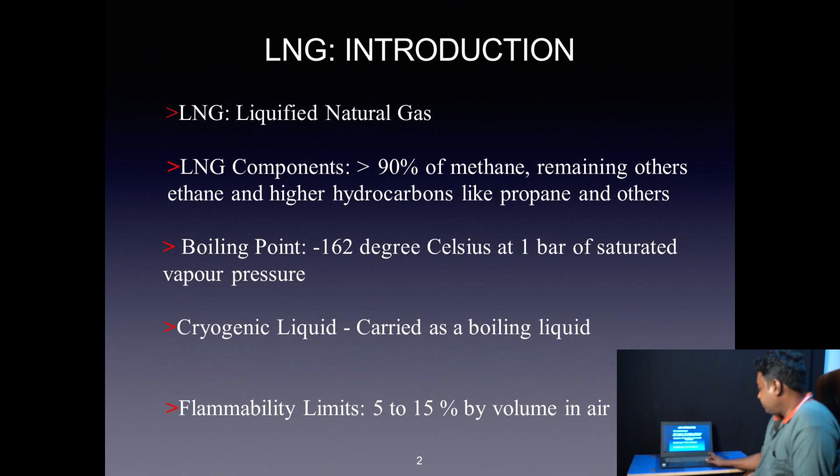Then what is LNG bunkering? Bunkering means the process of transferring fuel to ship for its own consumption, and LNG bunkering means transferring LNG as a fuel to ship for its own consumption.

Why is LNG bunkering needed? Because currently heavy fuel oil is the main marine transportation fuel, but it contains a huge amount of sulfur, that is 5000 ppm, meaning 5000 mg per liter of HFO, heavy fuel oil, meaning 5 gram per liter of heavy fuel oil, and it is too much.

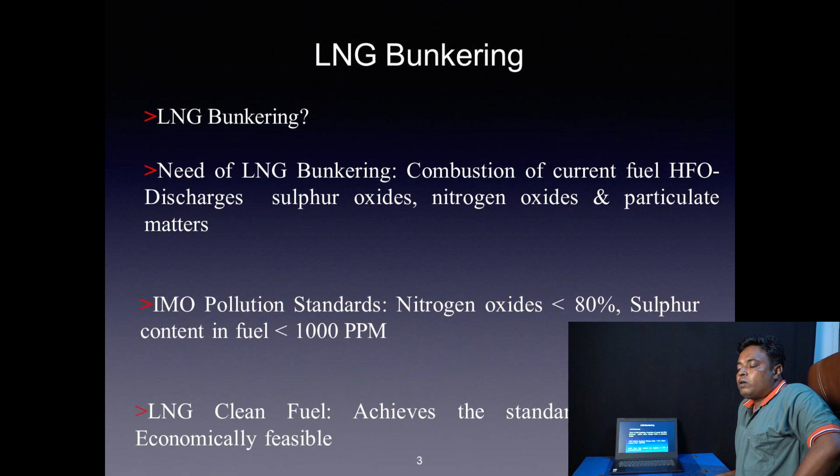And the other thing is, once sulfur oxide is released from the combustion of the ship engine, it is almost 2700 times higher than from road vehicles. Therefore, International Maritime Organization set the pollution standard according to which nitrogen oxide has to reduce by 80%, and the sulfur content in the fuel has to reduce below 1000 ppm, which is currently in the range of 5000 ppm, and therefore there is need to reduce it from 5000 ppm to 1000 ppm.

And the alternate fuel, clean fuel, is LNG, which is cheap and which achieves the pollution standards decided by the International Maritime Organization.

Then what is the existing LNG bunkering protocol? As per the existing protocol, pre-inerting is necessary to carry out, to displace oxygen by inert gas nitrogen, and pre-inerting is carried out till the composition of oxygen in the exit stream reaches equal to or less than 1%, and pre-inerting is followed by purging.

Purging is carried out to displace nitrogen by LNG vapors, and it is carried out till the LNG vapors get detected inside the exit stream. Then purging is followed by cooling.

Cooling of bunker lines has to be carried out to the temperature of the LNG to be bunkered, and once the cooling operation gets over, the actual transfer operation can be initiated. During the transfer operation, LNG fuel can be transferred from a storage tank to the ship's fuel tank.

Once the transfer operation gets over, it is necessary to drain out the LNG from the bunker lines. Otherwise, it gets warm, vaporizes, and pressurizes the steel structured pipelines and flexible hoses, and finally bursts out these pipelines and hoses. Therefore, it is necessary to carry out the draining operation.

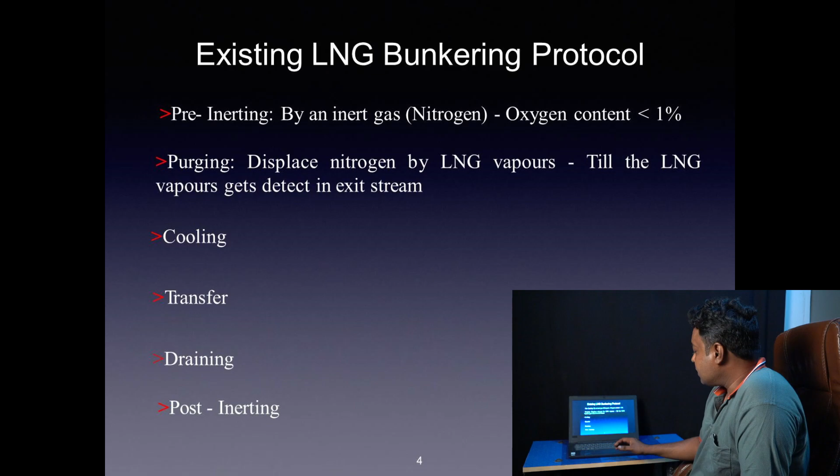This is the brief graphical presentation of the existing LNG bunkering protocol. First of all, connect the hoses and pass nitrogen through the bunker line for carrying out pre-inerting. Pre-inerting is followed by purging, which is carried out by displacing nitrogen with LNG vapors.

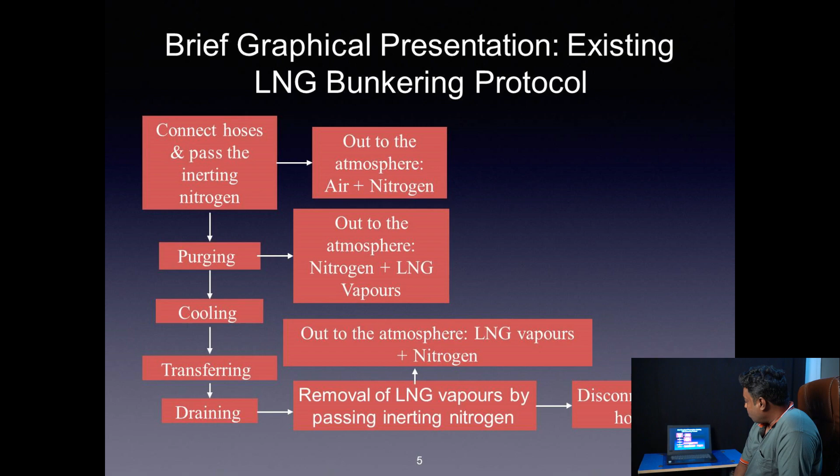Purging is followed by cooling. Cooling of the bunker line is carried out to cool the bunker lines to the temperature of the LNG to be bunkered, and once the cooling operation gets over, actual transferring can be initiated. Once the transfer operation gets over, it is necessary to drain out the LNG from the bunker line, and after draining there is need to remove the LNG vapors from the bunker line by passing nitrogen, which is called post-inerting. Once the post-inerting operation gets over, then we can disconnect the hoses.

This is a possible LNG bunkering system designed on the basis of the existing LNG bunkering protocol, but there are some limitations associated with it. Pre and post inerting operations are time consuming, and nitrogen is needed to carry out these operations. Therefore, a nitrogen generation system should be available there, which makes it economically not feasible or beneficial.

Then during purging, there is exit of LNG vapors from the bunker pipelines, which forms a flammability zone in the vicinity of the bunkering system. Then cooling is also time consuming.

Draining: during draining there is a possibility of LNG getting trapped inside the sealed structure, which will get warm, vaporize, and pressurize the hoses and steel structured pipelines. Therefore, finally these pipelines and hoses get burst out.

Then during post-inerting there is the exit of LNG vapors, and these LNG vapors form the flammability zone in the vicinity of the bunkering system. Therefore, it is necessary to burn these LNG vapors before allowing them to pass to the open environment.

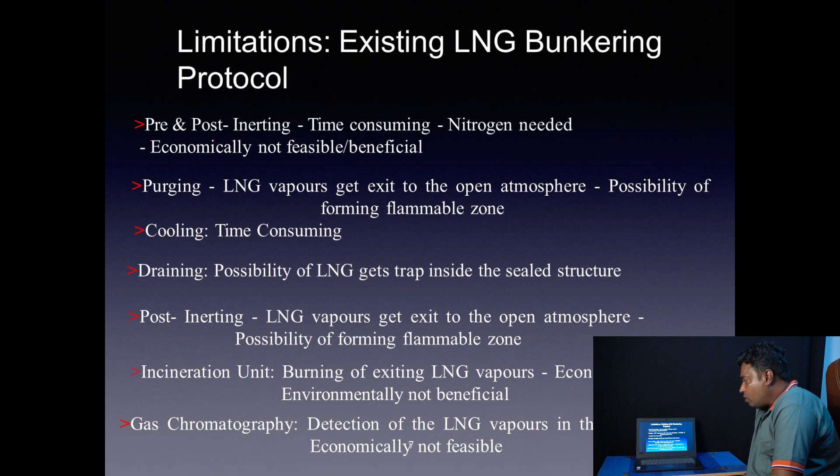Then gas chromatography is needed to detect the composition of oxygen in the exit stream while the pre-inerting operation is in progress, and to detect LNG vapors while purging and post-inerting operations are in progress. Implementation of gas chromatography is economically not feasible.

It is necessary to predict the time layout of the existing LNG bunkering protocol. This is the pilot plant in which LNG can be bunkered from the storage tank to the ship's fuel tank.

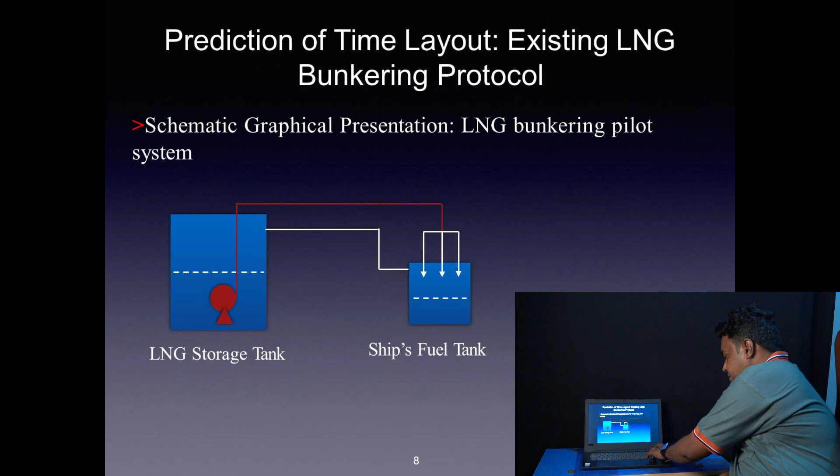Time required for pre-inerting and post-inerting has been estimated on the basis of exit age distribution, meaning RTD study.

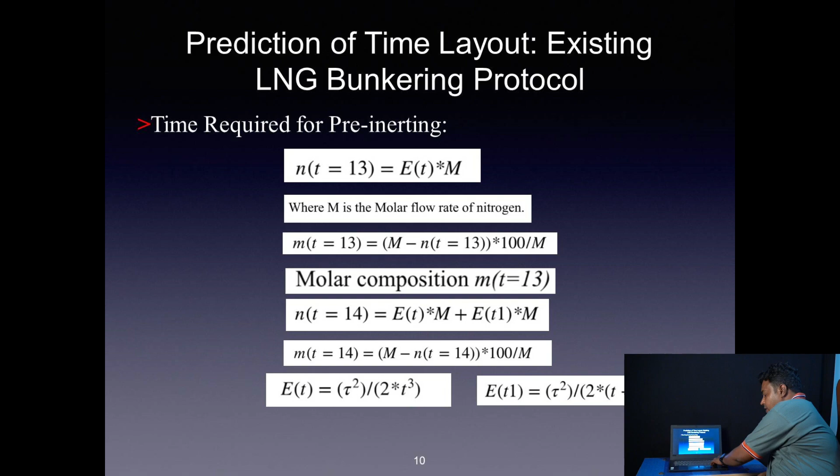The time required for purging is nothing but the time equal to half of the residence time, and the cooling time has been estimated by doing the heat balance across the bunker pipeline.

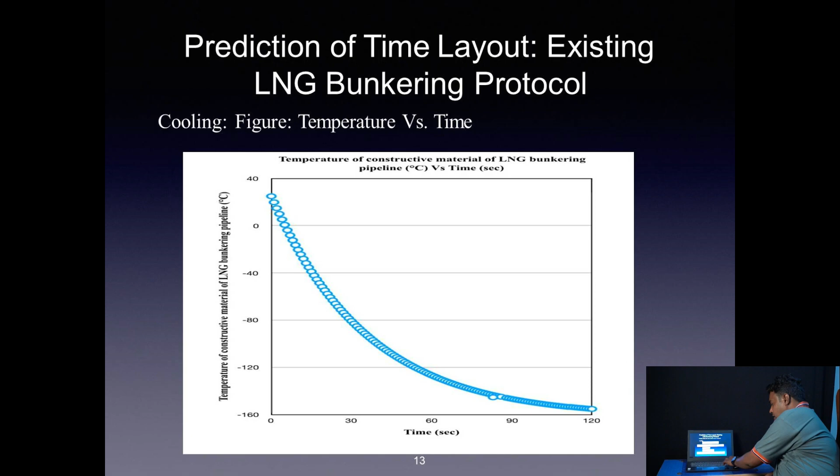The time of transferring has been estimated on the basis of the total volume that needs to be transferred and the transferring flow rate of LNG.

The time required for drainage has been estimated on the basis of the volume of the bunker pipeline and the draining flow rate of the LNG.

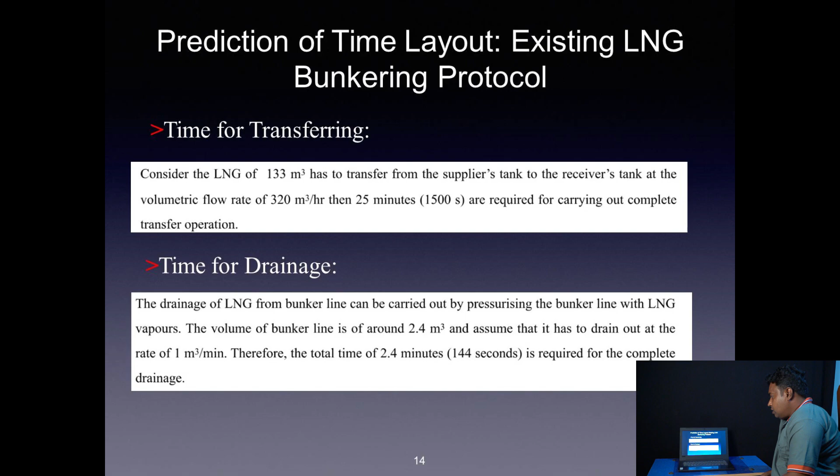But this is too much time consuming. It is not easy to operate. The existing LNG bunkering protocol is not easy to operate.

It is time consuming, and nitrogen is needed for carrying out pre-inerting and post-inerting. Therefore, it is not economically feasible.

There is a need to burn out the LNG vapors which exit from the purging and post-inerting operations, and this is not environmentally beneficial or environment friendly. By considering all these technical limitations, we have invented a new protocol, which is called the novel LNG bunkering protocol.

As per the novel LNG bunkering protocol, we have to apply vacuum and suck the air content from the bunker lines, and once the air gets removed from the bunker line by applying vacuum, then cooling of bunker lines can be initiated by passing LNG vapors through the bunker line.

And once the cooling of the bunker line occurs to the temperature of LNG to be bunkered, then actual transferring of LNG can be initiated.

And once the transfer operation gets over, then there is a need to drain out the LNG from the bunker line. Once the draining operation gets over, the bunker line contains only LNG vapors.

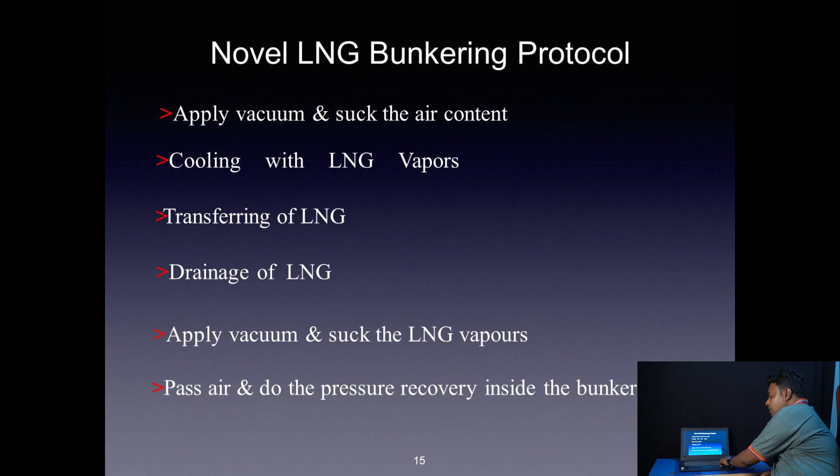Therefore we can pass air inside the bunker line for pressure recovery. And once the pressure recovery is done, then we can disconnect the hoses.

This is the brief graphical representation of the novel LNG bunkering protocol. First of all, connect the hoses and apply vacuum to suck the air content.

Once the vacuum gets developed inside the bunker line, we can pass the LNG vapors and circulate these vapors through the bunker line to cool down the bunker lines to the temperature of the LNG to be bunkered.

The cooling operation is followed by transferring. Once the transferring gets over, then we have to carry out the draining of LNG from the bunker lines to the storage tank.

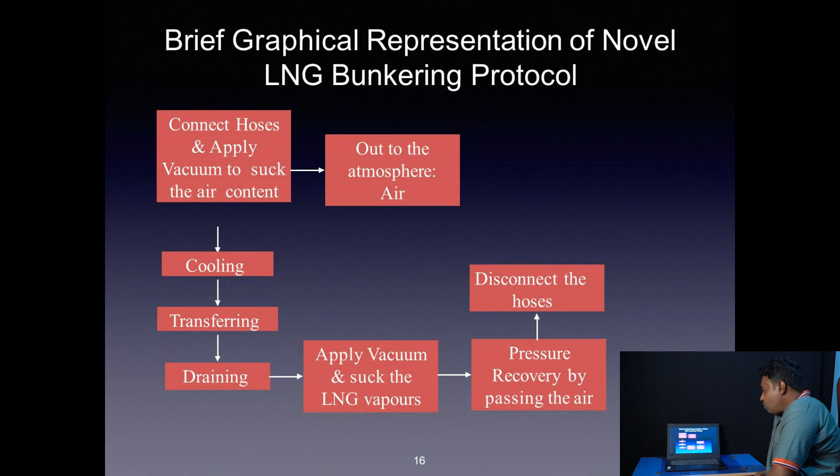And once the draining gets over, then we have to apply vacuum and suck the LNG vapors. Once the LNG vapors get removed from the bunker lines completely, then we can pass air inside the bunker lines for pressure recovery, and once the pressure recovery is done, then we can disconnect the hoses.

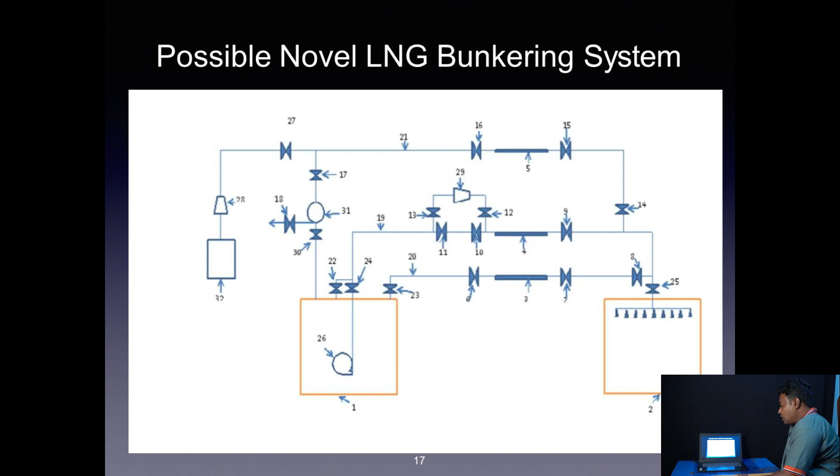This is the possible LNG bunkering system designed on the suggested or invented novel bunkering protocol.

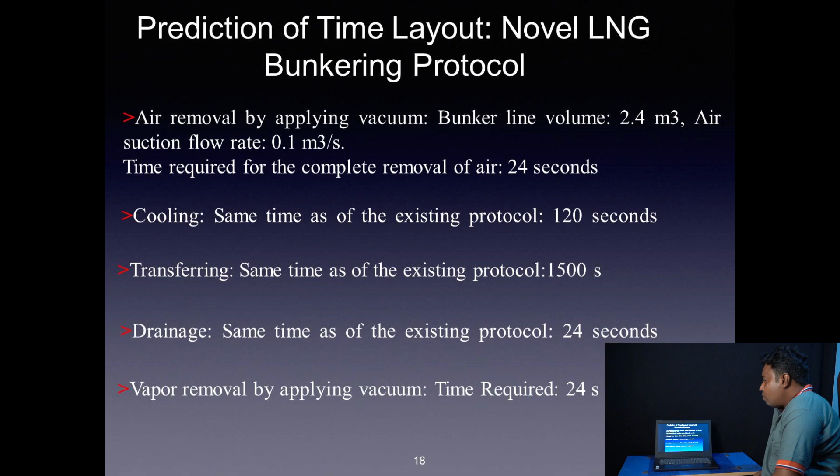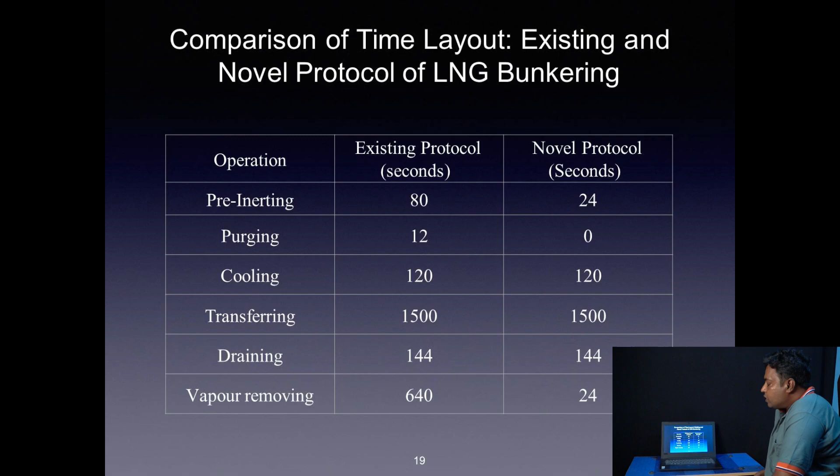The prediction of time layout for the novel LNG bunkering protocol has been estimated and compared with the existing LNG bunkering protocol. From this study, it is observed that the novel LNG bunkering protocol is time efficient as compared to the existing LNG bunkering protocol.

These two protocols have been compared on other aspects also. The first aspect is the need of nitrogen.

As per the existing protocol, pre and post inerting operations have to be carried out, and therefore nitrogen is needed for that, which increases the capital as well as operating cost.

But as far as the novel protocol is considered, there are no pre or post inerting operations to carry out, and therefore there is no need of nitrogen.

Therefore, operating cost and capital cost can be reduced. The implementation of gas chromatography is the second aspect.

As far as the existing protocol is considered, there is a need to detect the composition of oxygen while the pre-inerting operation is in progress, and also to detect the composition of LNG vapors while the purging and post-inerting operations are in progress. Therefore, gas chromatography is needed in the existing protocol. But as far as the novel protocol is considered, purging operations, pre-inerting and post-inerting operations are completely avoided. Therefore, there is no need for implementation of gas chromatography.

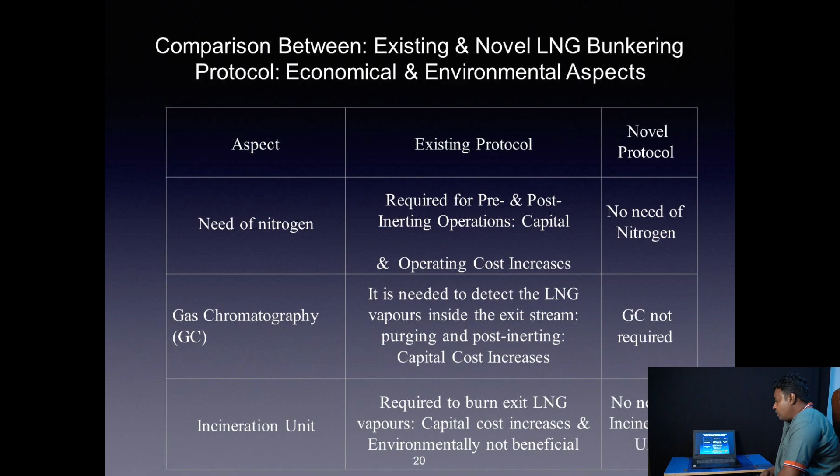The capital cost of the project increases, and if we are burning the LNG vapors, it is not environmentally beneficial either. But as far as the novel protocol is considered, we are avoiding the purging and post-inerting operations. Therefore, there is no need to install the incineration unit. Therefore, it is economically feasible and environmentally beneficial also.

Then we have developed one more protocol, called the accelerated novel LNG bunkering protocol. In this protocol, we use vacuum to suck the air from the bunker lines, and once the bunker lines are evacuated completely, we initiate the transferring operations.

We are not doing the cooling operations—why, we will explain later on. Then, once the transferring operation gets over, we carry out the draining of the bunker line, draining the LNG from the bunker lines to the storage tank.

Once the draining operation gets over, LNG vapors might be present inside the bunker lines, and these have to be removed. Therefore, we are applying vacuum once again to suck these LNG vapors and pass them to the storage tank.

The applied vacuum not only sucks the LNG vapors but also vaporizes the LNG trapped in the seal structure. Therefore, the possibility of the seal structured pipelines or hoses bursting over time is completely avoided. Once the LNG vapors are removed completely from the bunker line, pressure recovery has to be done.

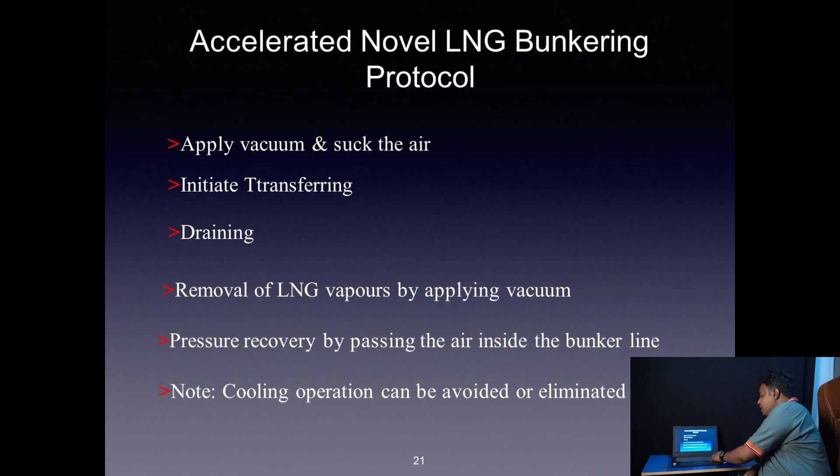Pressure recovery is done by passing air inside the bunker line, and once the pressure recovery is done, we have to disconnect the hoses. We avoided the cooling operation, which is too time consuming.

The graphical presentation of the accelerated LNG bunkering protocol is as follows. First, connect the hoses and apply vacuum to suck out the air content. Once the air gets removed from the bunker line, the transferring operation can be initiated, and once the transfer operation gets over, the draining operation can be initiated.

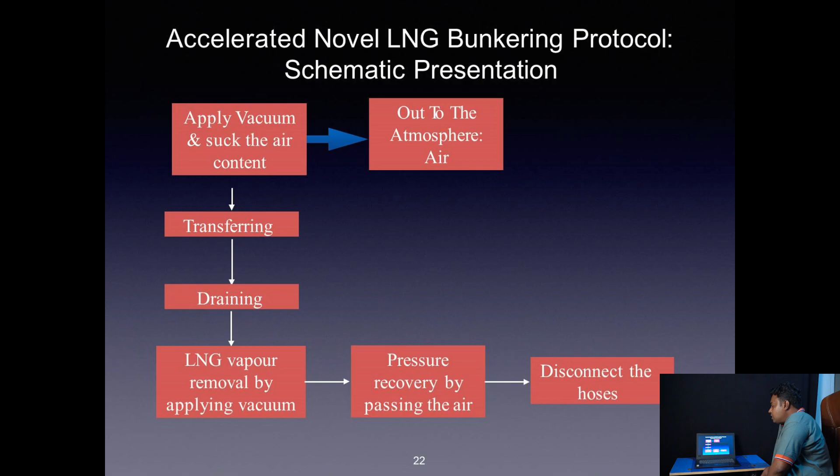Once the draining operation gets over, the LNG vapors from the bunker line can be removed by applying vacuum, and once the complete LNG vapors are removed from the bunker lines, pressure recovery can be done by passing air. Once the pressure is recovered, we can disconnect the hoses.

The confidential part is how to avoid the cooling operation. This has been avoided by designing the seal structured pipelines and hoses in such a way that there is no need of carrying out cooling for every cycle, and the designed hoses and seal pipelines should be capable of sustaining the negative pressure when we are applying vacuum inside the bunker lines.

This is the novel part on which we have filed the patent. There are so many people in the world doing research on this topic for almost the last 25 years, but they are not coming across the exact path of how to carry out LNG bunkering, and they developed the existing LNG bunkering protocol which we have discussed already.

This protocol is approved by the American Bureau of Shipping, and it has so many limitations as we already discussed. Therefore, we developed another protocol—the novel protocol—which is easy to operate, time efficient, economically feasible, and environmentally beneficial also.

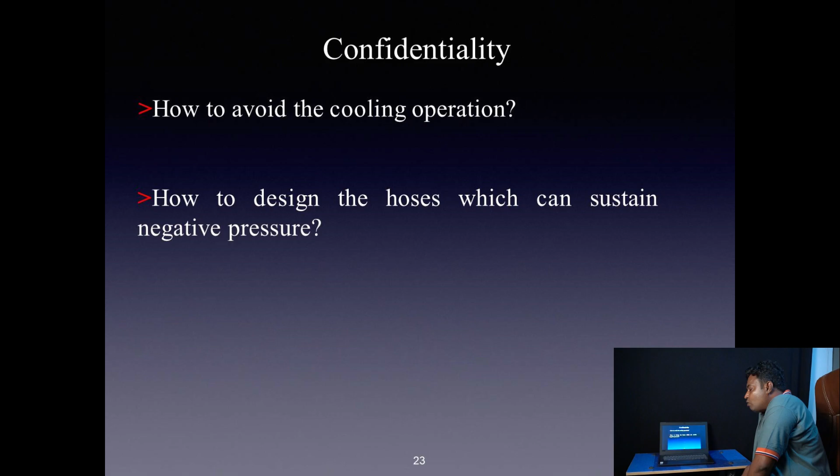Then we are coming across the second problem of LNG bunkering, because the rollover phenomena of the LNG storage tank is the major problem.

What is rollover? Rollover means inside the storage tank the rate of generation of boil off gas increases 10 to 100 times more than the normal value, and therefore pressure inside the tank increases and the pressure relief valve gets open, and huge amount of LNG vapors get escaped to the open surrounding. Sometimes it causes damage to the LNG storage tank.

The basic reason behind this is as follows: because of the density difference between the parent LNG and the filling LNG. That difference comes in density due to difference in temperature, difference in composition, or both. And if the parent LNG and the filling LNG are not mixed properly, then two layers get formed.

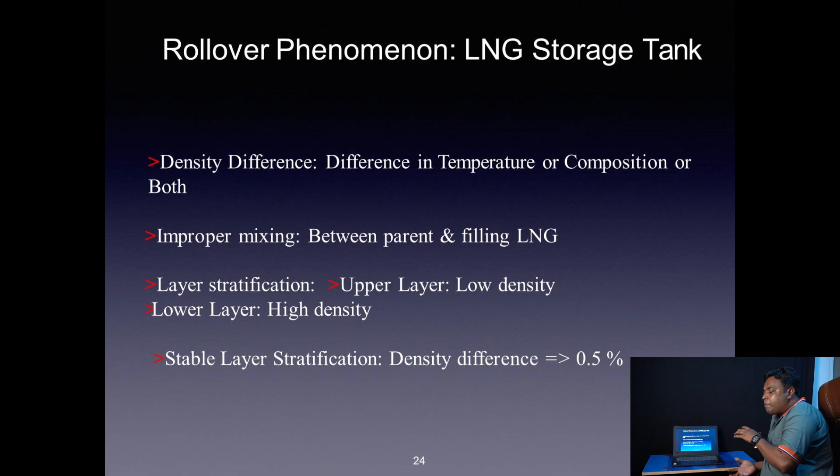And the time comes when the density of these two layers becomes equal. At that time instant mixing takes place, and therefore the thermal overfill of the lower layer gets released in the form of latent heat of evaporation, and a huge amount of boil off gas generates - 10 to 100 times more than the normal boil off rate - which increases the pressure inside the tank. This can damage the tank, or open the pressure relief valve and get released to the open surrounding.

And the other thing is, when the two layers mix vigorously, the heat of mixing is also responsible for increasing the rate of generation of boil off gas.

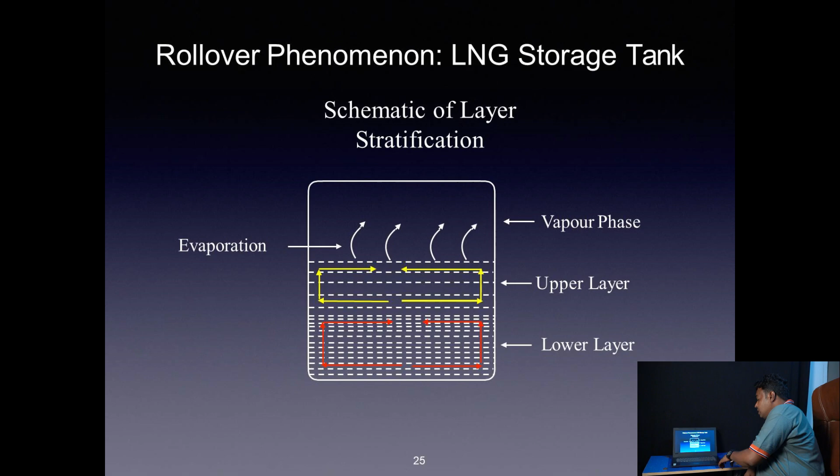This rollover phenomenon was first observed in 1972, and after that there were 40 events of rollover phenomena occurring in the world with cryogenic liquids. But scientists still haven't reached an ideal solution for how to prevent LNG bunkering, or how to prevent LNG or any cryogenic liquid rollover phenomenon occurring inside the storage tank. Therefore we came up with the ideal solution about how to solve this problem and how to control it if accidentally LNG rollover phenomenon occurs with cryogenic liquids.

These are the features, these are the factors we have to consider during the rollover phenomenon. During rollover phenomenon, as we discussed earlier, instant mixing between two stratified layers occurs.

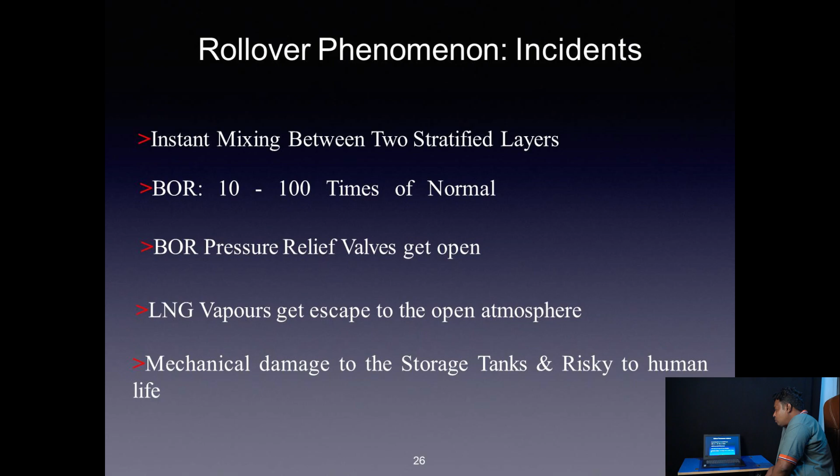Therefore the boil off rate increases 10 to 100 times as compared to the normal rate, and therefore that increased boil off gas generation rate increases the pressure, and the pressure relief valve gets open, and these vapors escape to the open atmosphere. Otherwise it can also cause damage to the storage tanks, and it is very risky to the surrounding human beings.

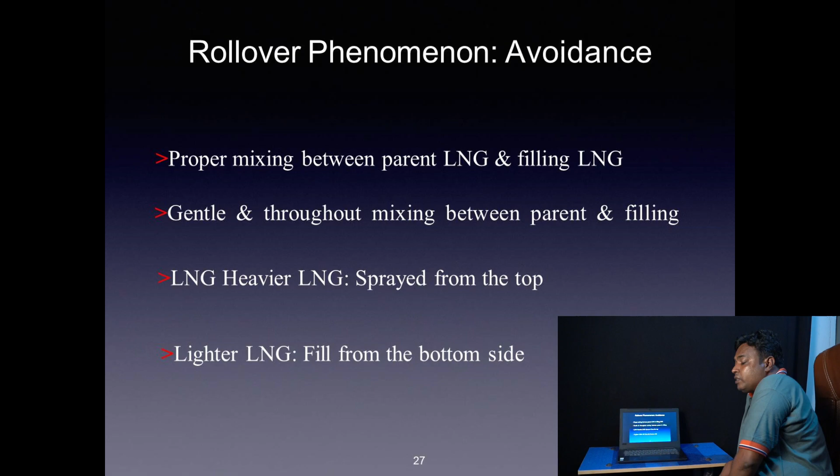And how to avoid the rollover phenomenon - because world scientists haven't reached a proper solution till today's date - we have given the proper and novel solution to this rollover phenomenon.

To avoid the rollover phenomenon, it is necessary to carry out proper mixing between the parent LNG and the filling LNG. The mixing should be gentle, and it should occur throughout the entire liquid holdup of the storage tank.

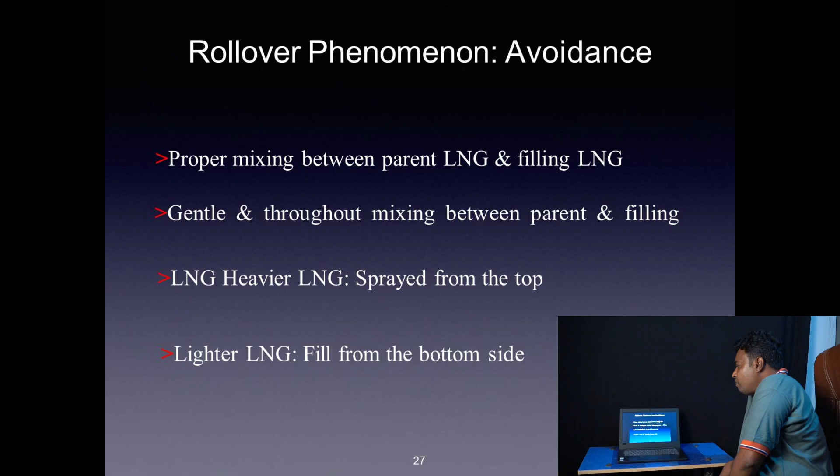If the filling LNG is heavier, then it has to be sprayed from the top side. If the filling LNG is lighter as compared to the parent LNG, then it has to be filled from the bottom side. And what will be the internal structure? We have to use multiple plates.

Once we are spraying heavier LNG from the top side, what will happen? These plates have a number of holes on their horizontal surface, and the holes of two adjacent plates should not have the same vertical axis.

Once this sprayed LNG drops down, it starts to spread across the entire cross-sectional area, and once it passes through the bottom side, it gets mixed throughout the entire liquid holdup of the storage tank. Therefore proper and gentle mixing can be carried out, and the possibility of layer stratification occurring can be avoided completely.

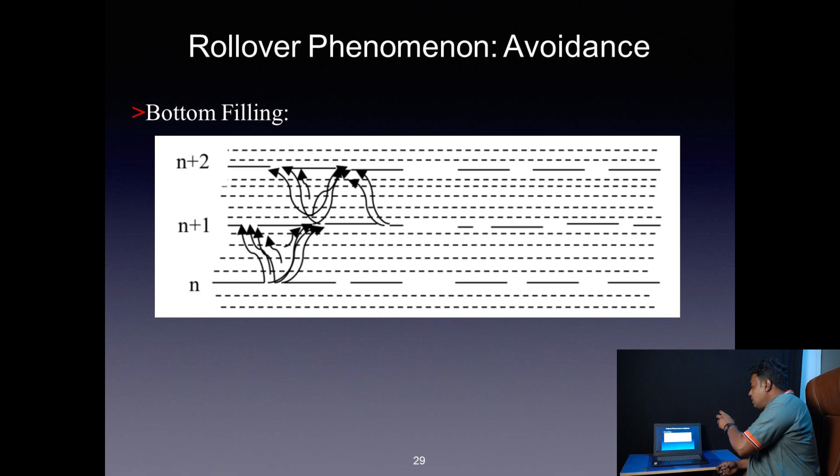The existing LNG bunkering protocol is developed by researchers working all over the world over the last 25 years, and that protocol is approved by the American Bureau of Shipping, and is called the existing LNG bunkering protocol. As per this protocol, we have to carry out pre-inerting, purging, and post-inerting also. These operations are time consuming, not easy to operate, economically not feasible, and environmentally not beneficial.

Therefore, there is a challenge in front of the bunkering world: how to carry out LNG bunkering in a simple way. We have given a novel protocol to the LNG bunkering world, according to which we can design a vacuum assisted LNG bunkering system.